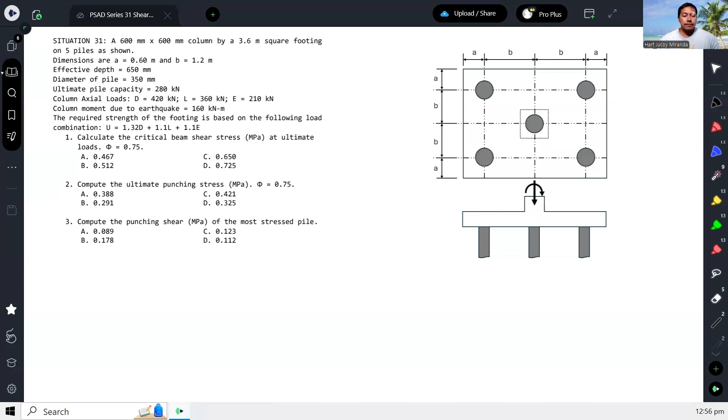If you would read this: a 600 millimeter by 600 millimeter column with a 3.6 meter square footing on 5 piles as shown. So in the drawing, this is the top view of the footing, this is the column. It's 600 by 600, so let me put the dimension: 0.6 by 0.6 meter. That's the column.

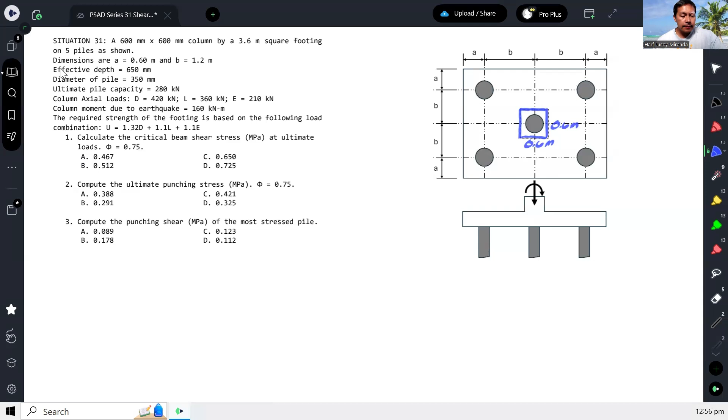Then the piles, the circles, their diameter is 350 millimeters. So diameter of the pile is 350 millimeters.

There are five piles: 1, 2, 3, 4, 5. A is 0.6, so this is 0.6, also this one. B is 1.2, so this is 1.2.

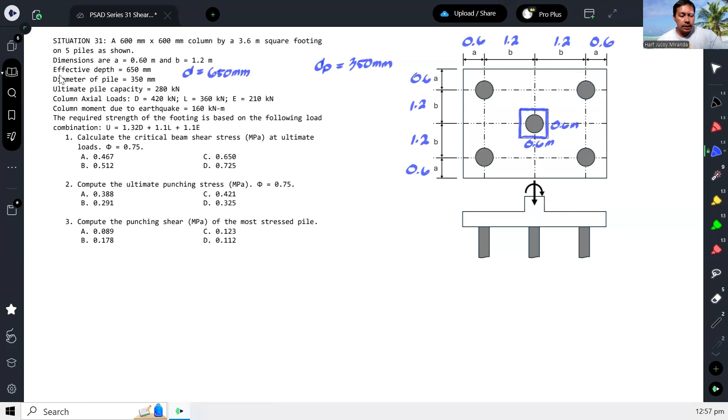Effective depth is 650 millimeters. Diameter of the pile, ultimate pile capacity - so the maximum reaction of the pile, maximum, is 280 kilonewtons.

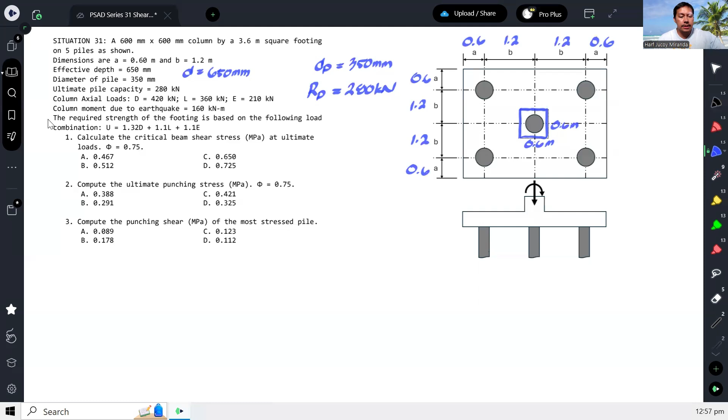That means the maximum it can resist. Column axial loads are given. Column moment due to earthquake is also given. The required strength of the footing is based on the following load combination.

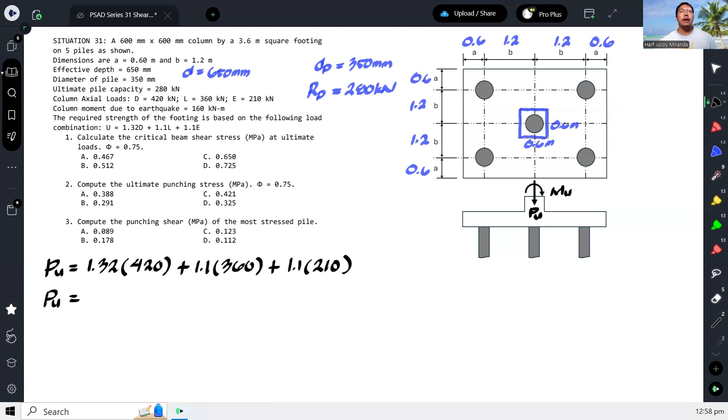Let's calculate that: 1.32 times 420 plus 1.1 times 360 plus 1.1 times 210. That gives us 1,181.4

kilonewtons. And then for our column moment, we will assume that this moment is unfactored, since it wasn't specified. So our ultimate moment will be equal to - since this is earthquake, the load factor is 1.1 times 160, which gives us 176 kilonewton-meters.

So those are now the factored loads on the column. Number 1: calculate the critical beam shear stress at ultimate loads. Then calculate the ultimate punching stress, and then calculate the punching stress of the most stressed pile. Actually, for all of these, although shear stress is being asked, we need to know what the reactions are at the piles. That's what we need to find out.

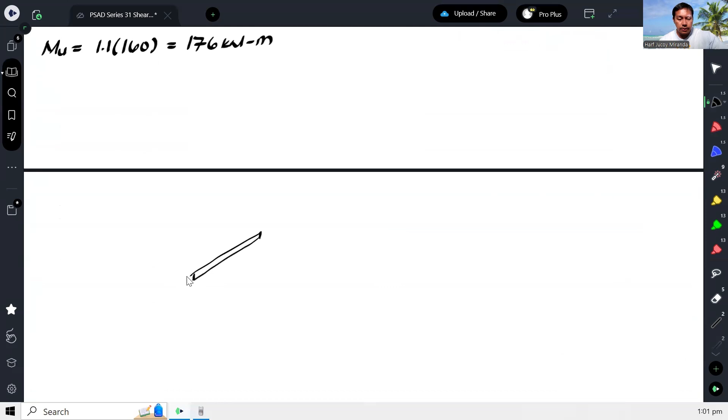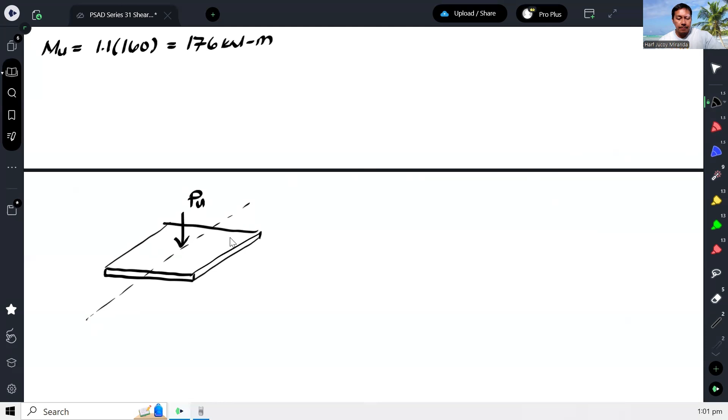So imagine this is our footing - again, just the concept first before we proceed with the main computation. Let's say this is the axis of bending. Let's say we apply an axial force PU at the center of the piles.

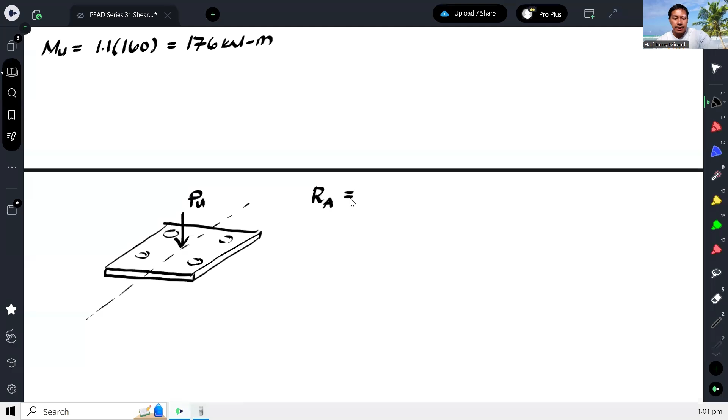So as I said, the reaction of the pile due to the axial load will just be PU divided by however many piles there are. Let's say N is the number of piles - that's already the reaction of the piles due to axial load.

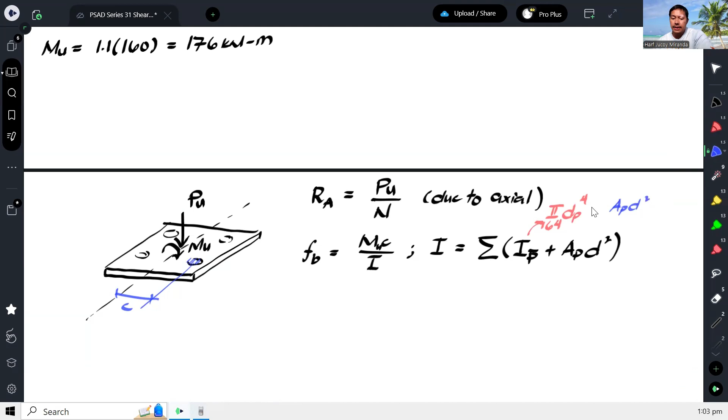Kaya lang, kapag kinompare daw natin ito, dito sa AP d squared, this is very small compare dito. Kaya ang ginagawa na lang dyan, nine-neglect na lang for simplicity. Okay, so therefore, ang nangyayari, nagiging summation na lang siya ng area ng pile times d squared.

Okay, so siguro gawin ko ito, instead na d, gawin nating r para sabihin ko lang na yung distance, radial distance nun. So bali, again, kung ito yung pile na tinutukoy, yung r ay measure mula sa axis of bending papunta dun sa pile. Ito yung r. Okay, so nagiging ganito ang moment of inertia.

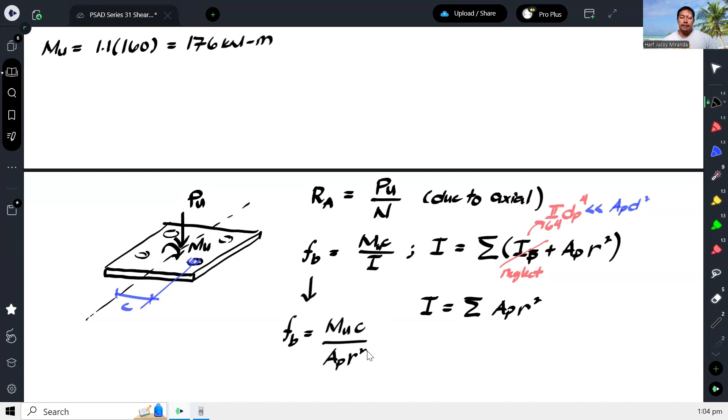So ibig sabihin, itong bending stress natin ay magiging mu c over AP r squared. Okay, na kung saan, kapag kinross multiply natin yan dun sa kaliwa, so magiging AP times FB is equal to mu C over R squared.

Actually, may summation dito, no, summation ng R squared. Etong part na to is, di ba, area times stress. Hindi ba yan ay reaction? Or yan ay force? Yan naman ang force due to the moment. Yan naman ang reaction ng pile due to the moment. So therefore, ang mangyayari, yung reaction ng pile due to moment is equal to mu C over summation of R squared.

Okay, kaya ngayon, pag pinag-combine natin yan, actually lahat ng yan, galing lang yan dito eh, galing lang yan lahat dito. So na yung normal stress ay equal sa P over A plus or minus MC over I. Dito lang yan galing. Kaya nangyari lang, ito, instead na P over A, no, magiging yung P kasi, PU over N, kasi kada pile.

PU over N over area ng pile. Plus or minus, yung M is MU, yung C is C, tapos over yung I natin is originally ito, no, summation of area ng pile times R squared. But once again, kapag in-cross multiply natin yan lahat dun sa stress, so magiging area ng pile times yung total stress is equal to PU over N plus or minus MUC over summation of R squared.

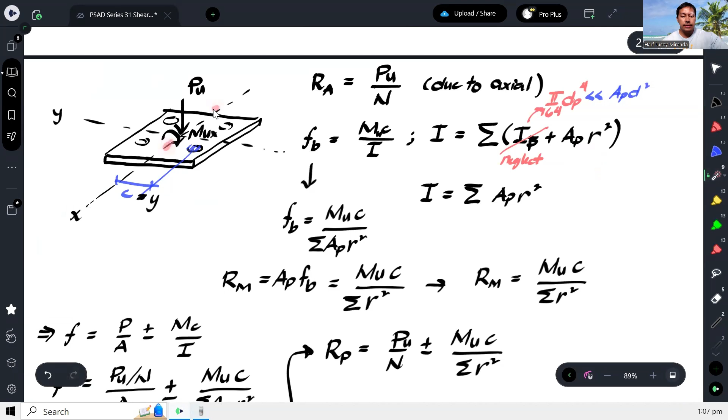Kasi yung R na yan, kung babalikan doon sa formula, di ba, mini-measure siya mula doon sa axis of bending, papunta doon sa kung ano yung pile na tinutukoy. Kaya mangyayari, revise nito, will be RP is equal to PU over N plus or minus MU about X times Y over summation of Y squared. Okay, ganyan yung nangyayari. Paano po kung meron pang bending sa kabila? Meron ding bending dito.

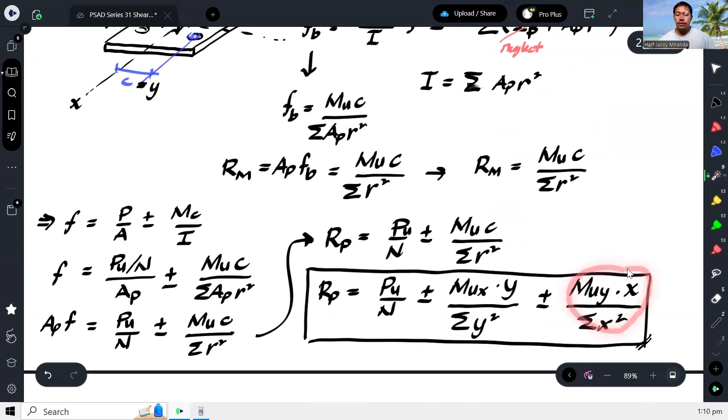So this is MUY. Therefore we have P over N. Let me just assume that compression is positive and tension is negative.

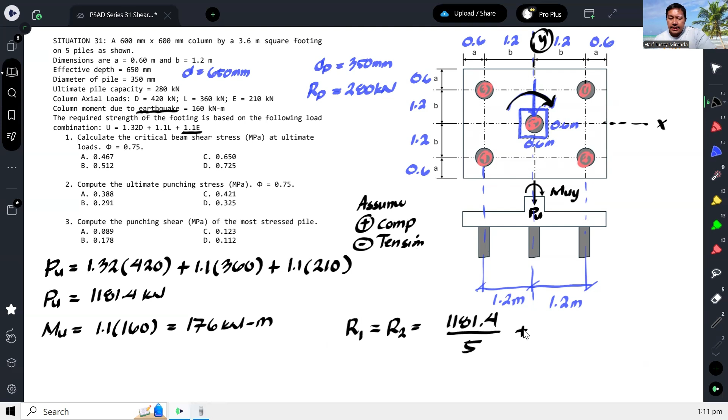Because what we expect for the reaction on foundations is compression. Anyway, for piles 1 and 2, we have P over N, which is 1181.4 divided by N, so 5 piles. Then plus, since this side is subject to compression, while the other side is subject to tension, and the other side is subject to compression.

So our M is 176. Then for Y, as I said, wherever the pile is from the axis of bending, just measure that distance. And that's it, so 1.2.

Over summation of y squared. So we just add up all their y values. The y of pile 1 is 1.2, the y of pile 2 is also 1.2, the y of pile 4 is 1.2, the y of pile 3 is 1.2, and the y of pile 5 is 0.

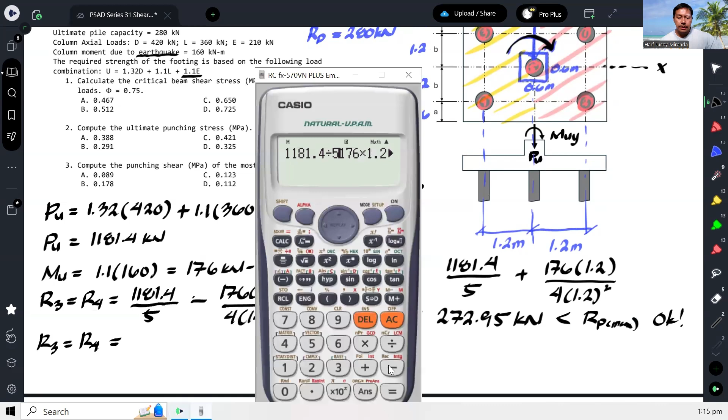Mangyayari dyan, R3 is equal to R4, which is going to be equal to, papalitan ko lang to ng minus. Okay, and as mentioned, mas maliit yan, 199.61 kilonewtons. So mas maliit, no? And then, kompletuhin ko na.

How about R5? Yung R5 is 1181.4 over 5. Tapos wala na to. Bakit? Kasi wala naman siyang distance mula dun sa neutral axis, kaya walang effect sa kanya yung bending, no? So that's why ang mangyayari lang dun kay 5 is burahin lang natin to. So magiging 236.28.

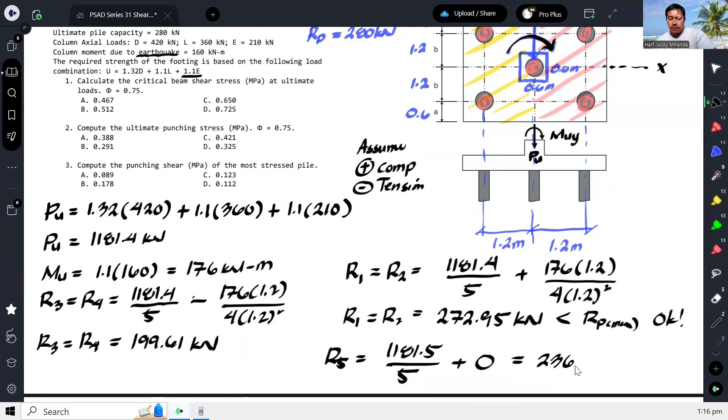So yan ngayon yung mga reactions ng pile, no? Kumbaga kapag i-drawing natin ng kompleto yan, so I'll try to do it, no? Kompleto.

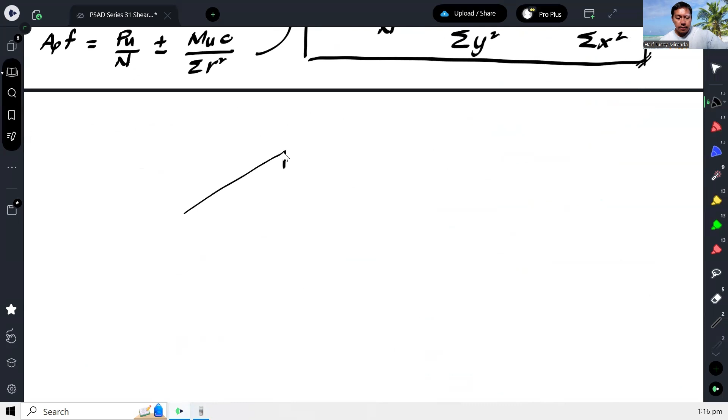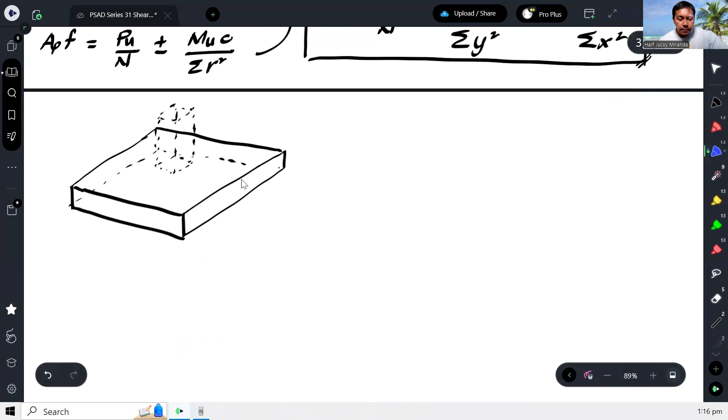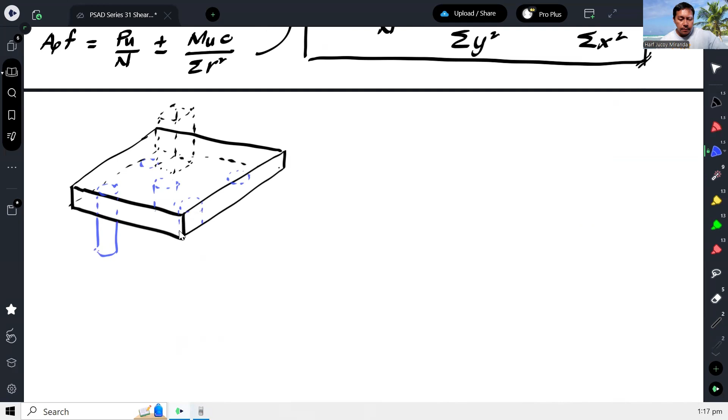So ito kunwari yung ano natin, footing, tas meron tayong pile dito sa ilalim. Okay, so ito yung unang pile. Yung pangalawa, yung nasa ilalim ng footing, yung 4 tsaka 3. Meron din dito. And then, ito pa nasa likod. Okay, sa inyo mga piles natin.

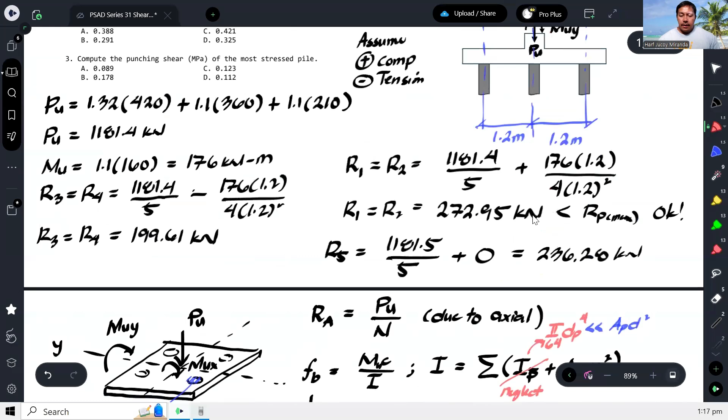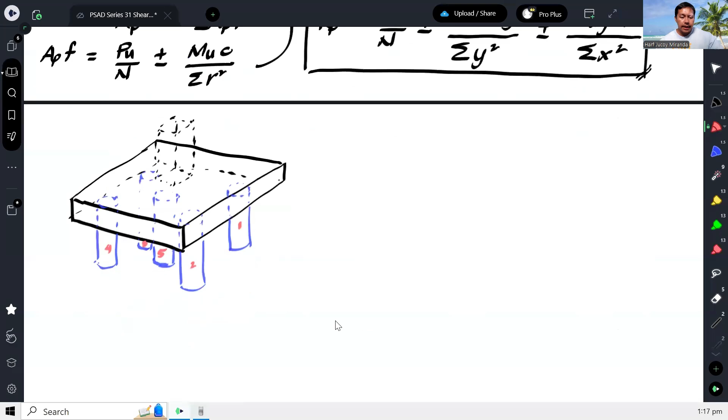So bali lumalabas ngayon, di ba, pinangalanan natin yan. Ito yung 1, 2, 3, 4. Ito yung 1, ito yung 2, ito yung 3, ito yung 4, ito yung 5. Okay, so lumalabas ngayon yung reaction dito, ito yung 272.95.

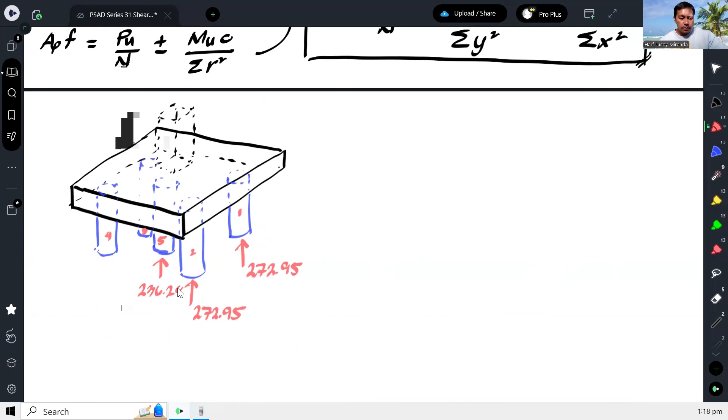Ito rin. Okay, yung reaction dito sa 5, ito naman yon, 236.28. Tapos yung reaction doon sa 3 at saka 4, yun naman yung 199.61.

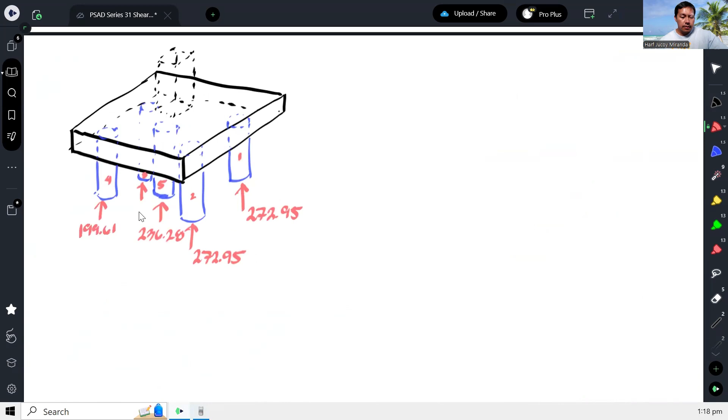So parang ganyan, no? Ganyan yung nangyayari. Tapos don't forget, meron pa tayong force dito, di ba? 1181.4, at saka may moment pa tayo na 176. Okay, so ganyan yung magiging reaction ng mga piles.

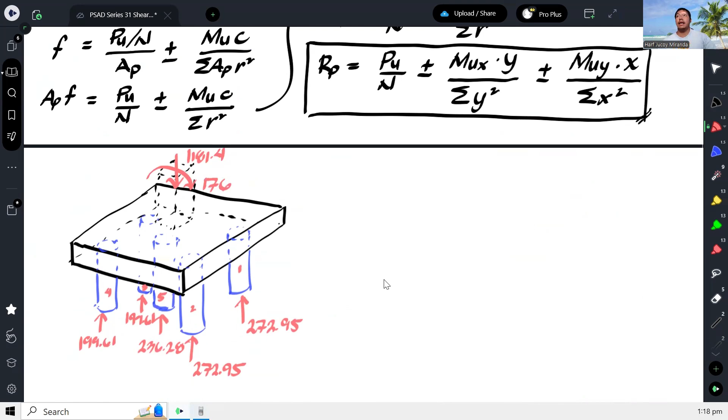So ngayon, pwede natin masagot yung mga tinatanong. Number 1, calculate the critical beam shear stress at ultimate load. So paano ba yung wide beam? Di ba, pwede mag-crack siya in this direction or in this direction. Basta lagi, ang critical section for wide beam shear is at a d distance from the face of the column.

No? Well, kung dito tayo magka-crack, ang kukontrahin netong crack na to is itong dalawang pile na to, okay, which has the maximum reaction. Kapag dito naman nag-crack, ang kukontrahin niya is yung reaction sa 1 tsaka sa 3. Kapag pinag-combine natin yun ay 272.95 tsaka 199.61, which kapag kinompare mo dun sa una, mas maliit, no? So kaya hindi yun yung critical.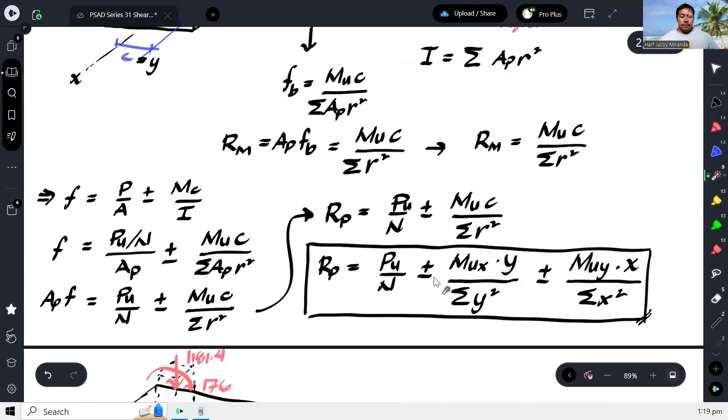Lalo na to, hindi ito critical kasi parehas 199 yan. So ang pinaka-critical lang talaga ito. Okay, ibig sabihin, so let me just redraw that. So ibig sabihin for number 1, okay, for number 1, i-consider natin na critical section ay ito.

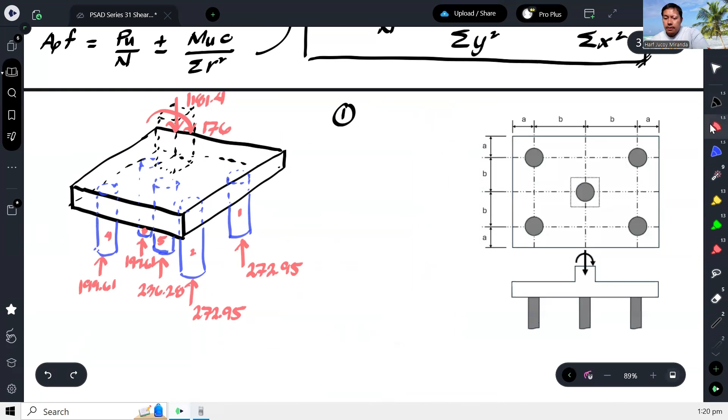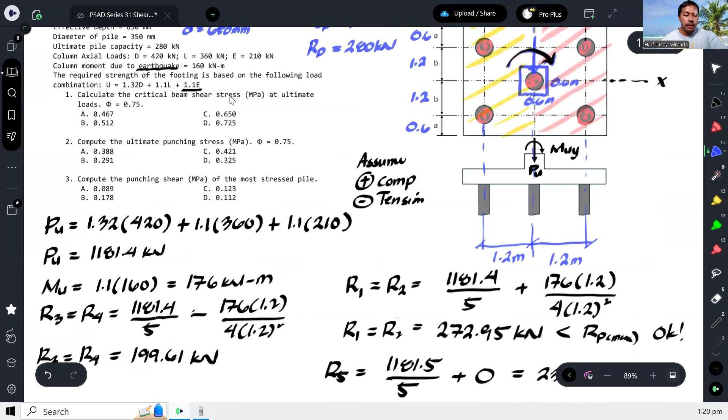Ayan, okay, so gawin natin yung red. So ito yung magiging basag niya. Okay, and it will happen at a d distance from the face of the support or face of the column. Okay, wherein D is the effective depth, and that is given in the problem, that was 650 millimeters.

Okay? So kapag in-isolate natin tong part na to, bali sa drawing ko dito, ito yan. Ayan yung mababasa. Okay, so kapag in-isolate natin yan, ganito siya. So ito yung crack, ayan. And then, ito yung dalawang piles.

Okay, so ang kukontra dun sa reaction ng pile na in this case ay dalawang 272.95 is itong surface na to. Yung critical section na yan.

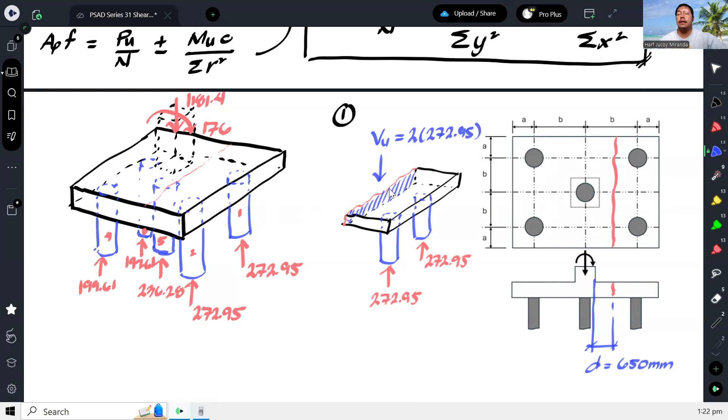Okay, yun na yung ultimate shear force at the critical section of wide beam shear. So that is simply 2 times 272.95 kapag nag-summation ng forces vertical. Okay, and to answer the first question, yung magiging, ano bang kailangan? Critical beam shear stress at ultimate loads.

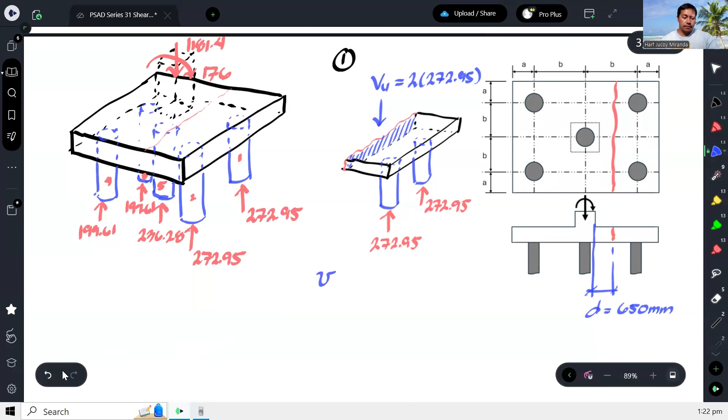So ibig sabihin, ang tinatanong dito ay, actually ang tinatanong dapat dito is ultimate beam shear stress. Okay, ultimate, kasi in-specify niya at ultimate loads. So ibig sabihin, ang kailangan natin dyan is, ulitin ko lang, no, itong Vn, okay, which is Vu over phi b0d. Okay, ito ay nominal shear stress.

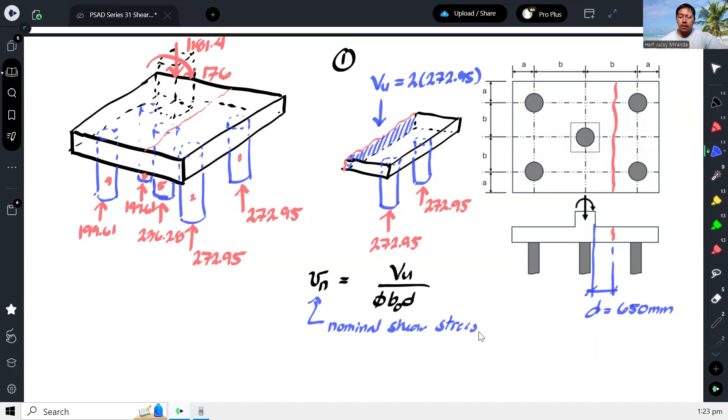Okay, that is nominal shear stress. If you want it to become ultimate shear stress, this phi, just cross multiply it. So it becomes phi Vn equals Vu over b0d. So this is the ultimate shear stress or design shear stress.

Okay, so this is what we'll adapt. We have phi Vn equals Vu, which is 2 times 272.95, let's convert to Newtons, so multiply by 1,000, over b0d. As mentioned in my previous discussions, remember that this b0 is the length of the crack, the length of the break.

What is this? If we add all of these up: 0.6 times 2 plus 1.2 times 2, that gives us 3.6. Actually, the dimension of the footing is 3.6 by 3.6, okay, 3.6 by 3.6.

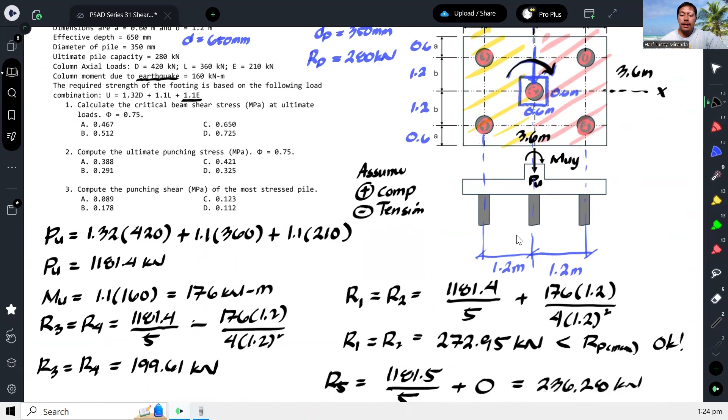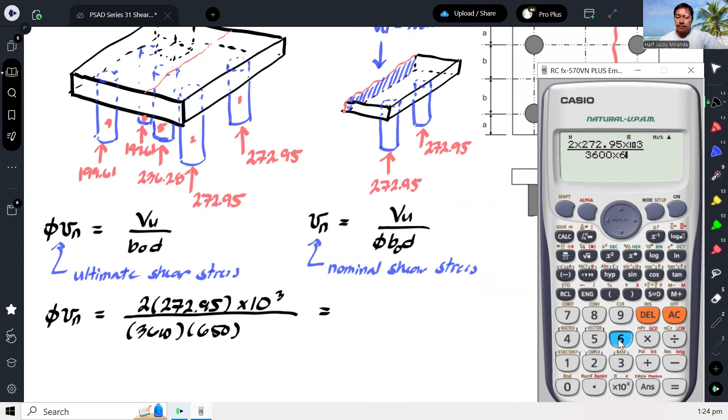So that will be the length of the crack, 3.6. So we have 3.6 or 3,600 millimeters times effective depth of 650, and that will be our ultimate or design shear stress. So that is 2 times 272.95 thousand over 3,600 times 650, and that gives us 0.233 megapascals.

Okay, and that will be our answer for number 1. Actually, it's not here. Let's check the nominal, 0.75. Okay, also not there. So I believe there's an error in the choices, so let me compute both.

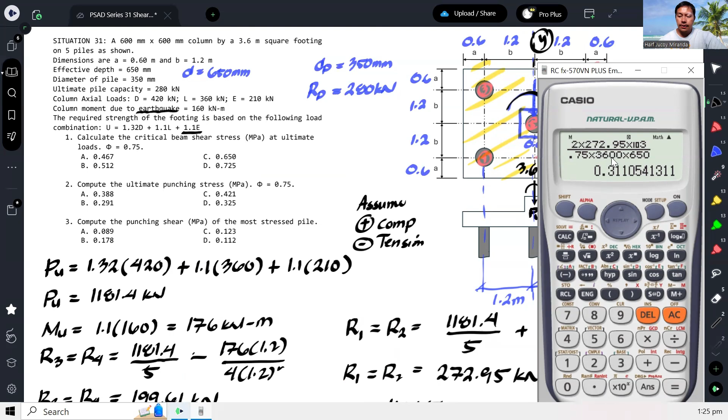If nominal, this is it. If ultimate, this is it. So nominal, this is nominal, this is the ultimate. So that is 0.233 megapascals. That should be the answer.

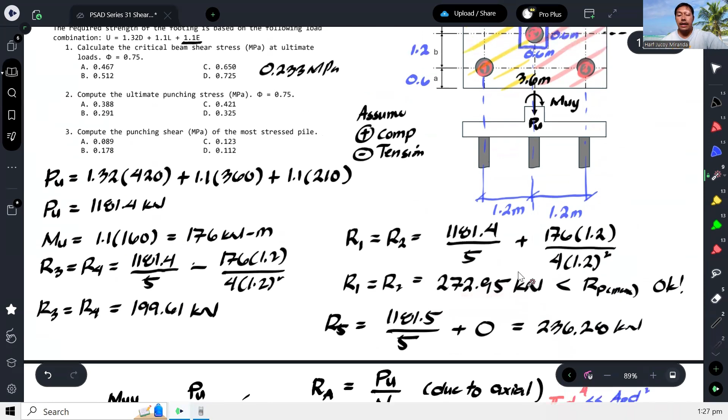So again, remember: punching shear will occur at a d over 2 distance around the column or pile. So this is how the crack looks. The measurement here is d over 2, same on the other side, so the total is just d. We just add d.

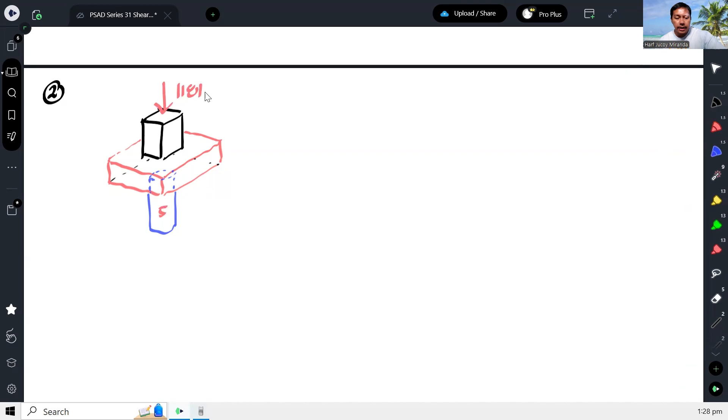So the part of the concrete that resists these forces is this one. Oh, and also at the back, and this one too, around the lateral surface area of the crack section. So here, this is the effective depth.

Then this measurement, let me shade it in black so it's visible. This measurement will be the length of the column plus effective depth, because if we recall, it's measured at a d over 2 distance from the face of the column. So this is d over 2, this is d over 2, and this is the length of the column, so the total is the length of the column plus d. And since the column is square, the other side is the same: length of column plus d.

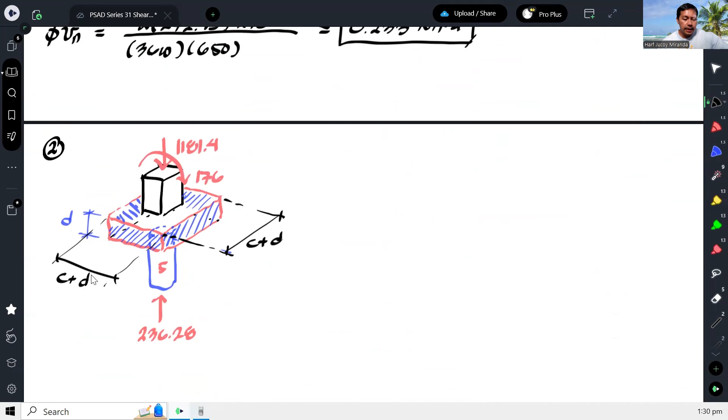Okay, now let's see what it equals. What is the length of the column? It's 600, 600. Then our effective depth is 650, so that gives us 1,250 millimeters.

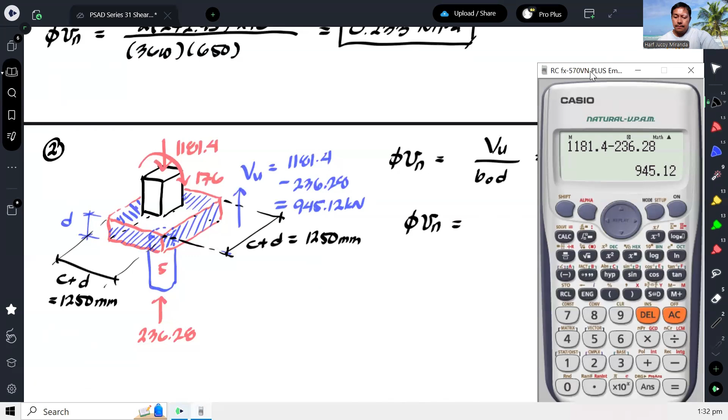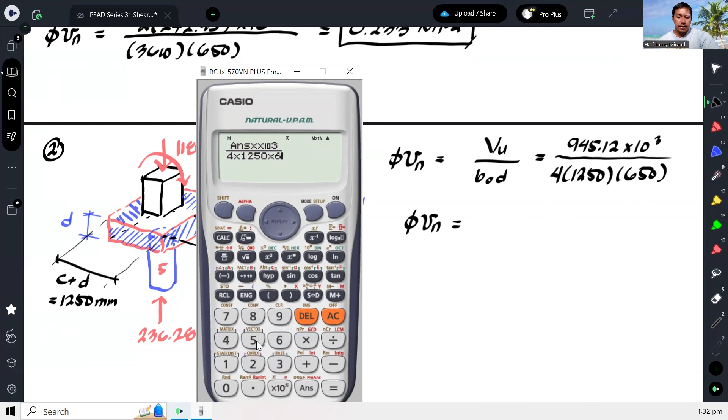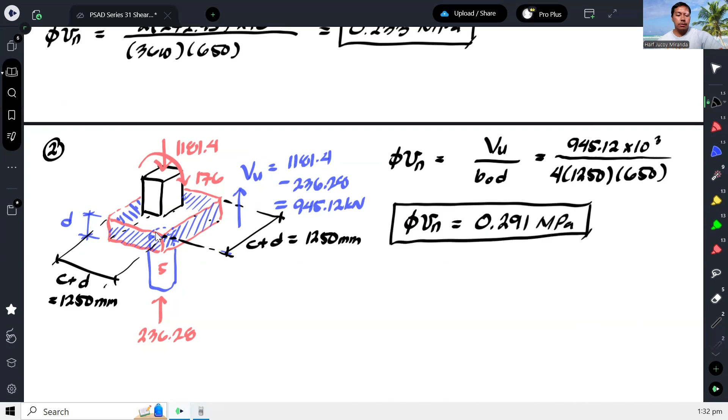Tapos effective depth na 650, and that will give us our ultimate shear stress. So that is 4 times 1,250 times 650. So 0.91, 0.291 rather, megapascals. Okay, and that will be our answer for number 2, letter B.

Okay, next, compute the punching shear of the most stressed pile. So hinahanap naman punching shear lang ng most stressed pile. Dito, alam naman natin na either 1 or 2 lang yung most stressed. So mamili na lang tayo ng isa.

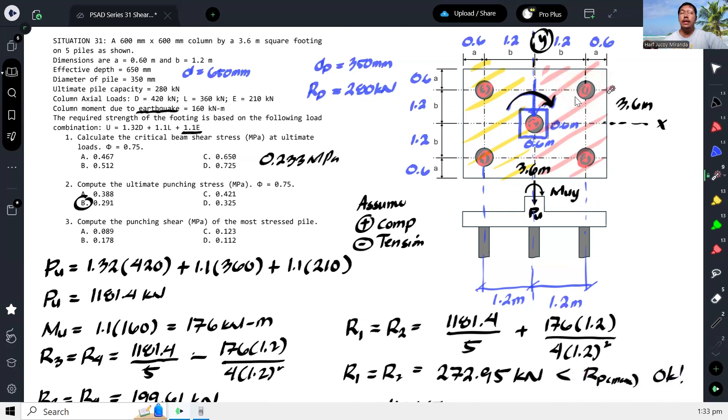Ganun ulit, ang idea ng punching shear is the crack will develop d over 2 distance from the surface of the pile around its perimeter. Kaya ibig sabihin, parang ganito mangyayari, magkakaroon ng crack na pag ganito, na ang sukat ay d over 2. So bali parang ganito yan sa number 3.

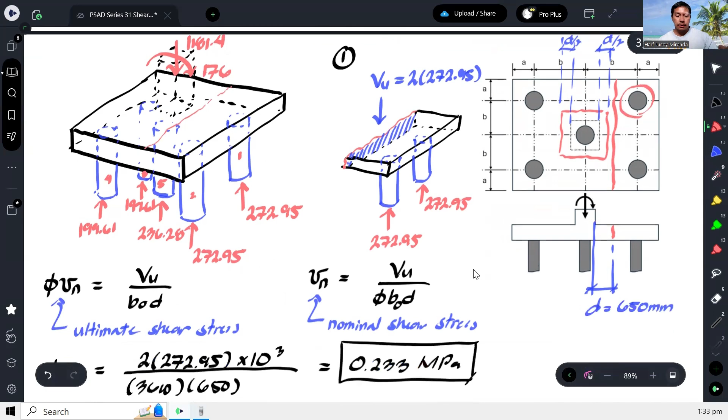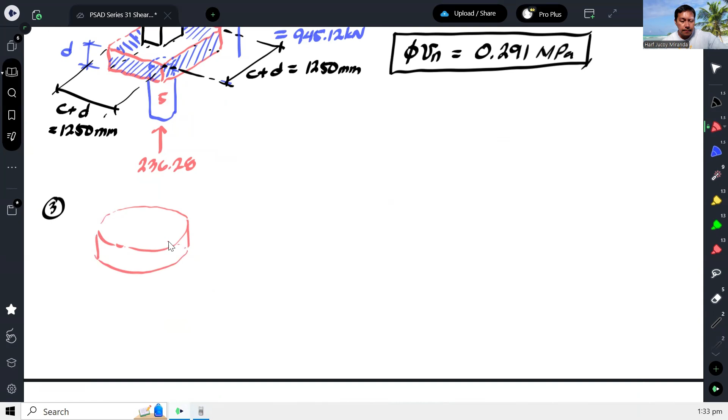Kunwari na lang, yung pile number 1 yung kunin ko. So mababasag niya itong ibabaw, yung magiging basag ng ibabaw. Okay? Tapos ito yung pile sa ilalim. Ito yung pile number 1.

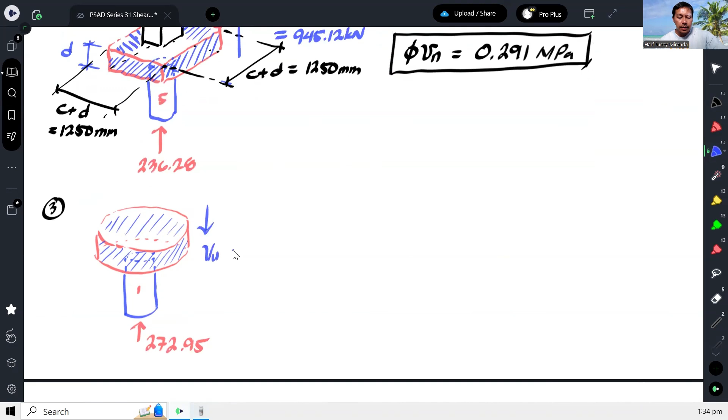272.95. Tapos yung kukontra dyan na part ng concrete, ito, sa kabila rin. Okay, so yung magiging reaction lang ng concrete na VU will just be exactly 272.95 kapag nag-summation of forces vertical. Tapos, ano pa?

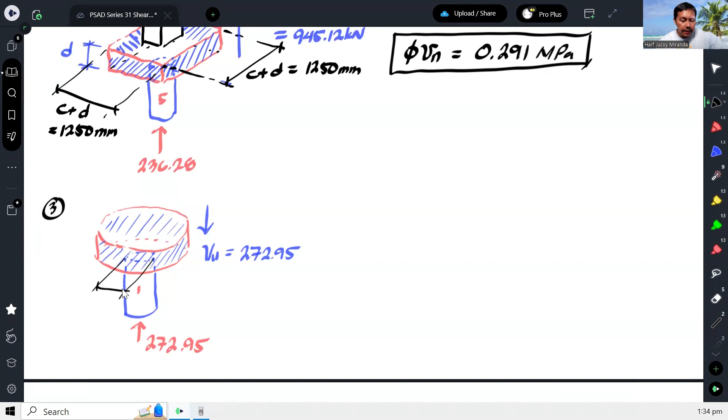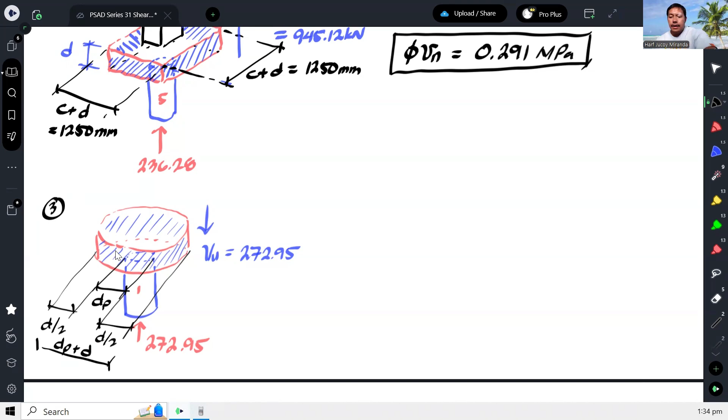Kailangan ko rin yung dimension nito. So magiging dimension lang nito, mula dito hanggang dito is diameter ng pile. Tapos sabi ko nga, mula dito hanggang dito will just be effective depth over 2, sa kabila ganun din. So ibig sabihin, yung total diameter niyan will just be the diameter of the pile plus yung effective depth.

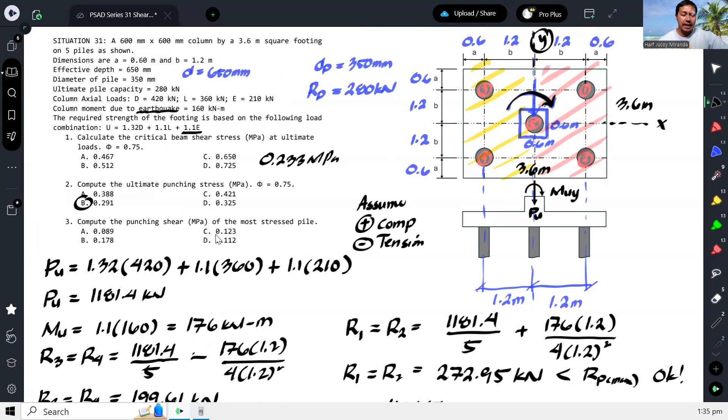At again, dahil ang tinatanong ay punching shear of the most stressed pile, walang nakaspecify kung ultimate or nominal. So check na lang natin mamaya. Kung ultimate halimbawa, for number 3, phi Vn is equal to Vu over bo d. Ang Vu natin is 272.95 times 1,000 para maging Newton, para maging automatic na megapascal yung sagot.

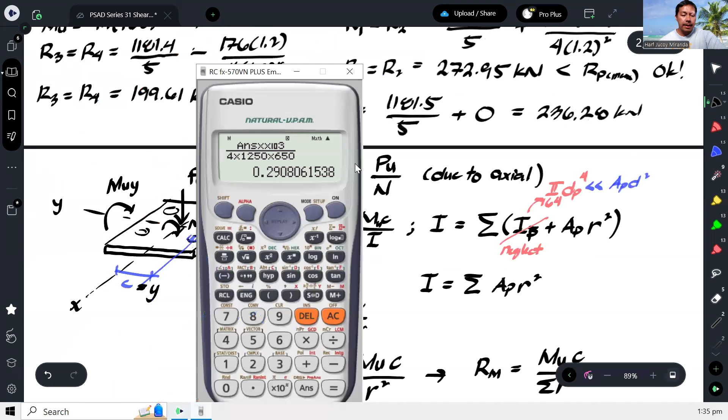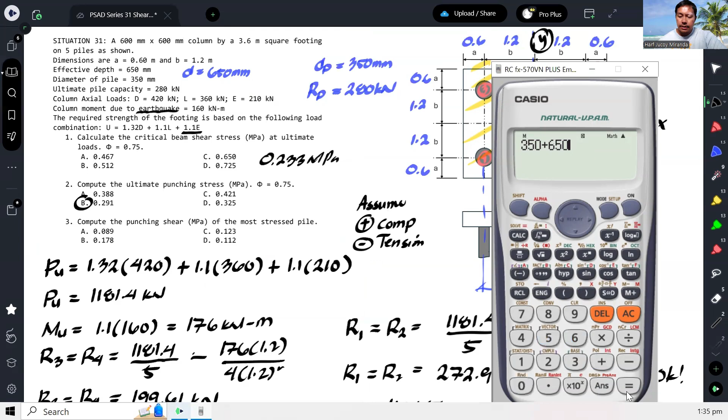Tapos yung BO is yung length ng crack, which is the circumference of the circle, na ang diameter ay diameter ng pile plus d. Ano nga pala yung diameter ng pile plus effective depth? Ang diameter ng pile given sa problem is 350, ang effective depth is 650. So that is 1,000 mm.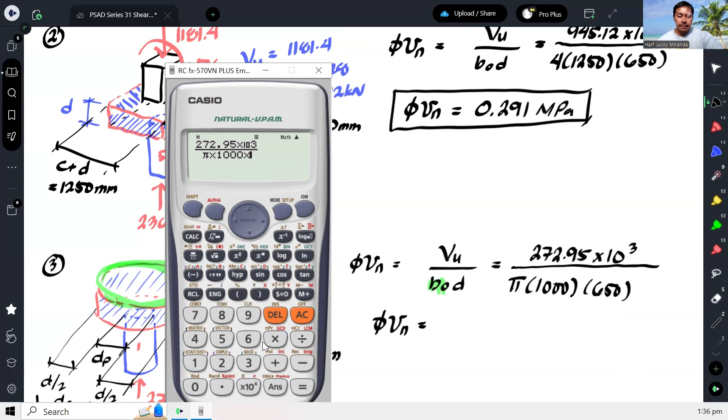Okay, ibig sabihin yung length ng basag is circumference. Di ba ang circumference ng circle, diameter times pi or pi times diameter. So pi times 1,000 times effective depth, 650, so times 650. Yung magiging ultimate shear stress dito will become 272,950 over pi times 1,000 times 650, and that gives me 0.134.

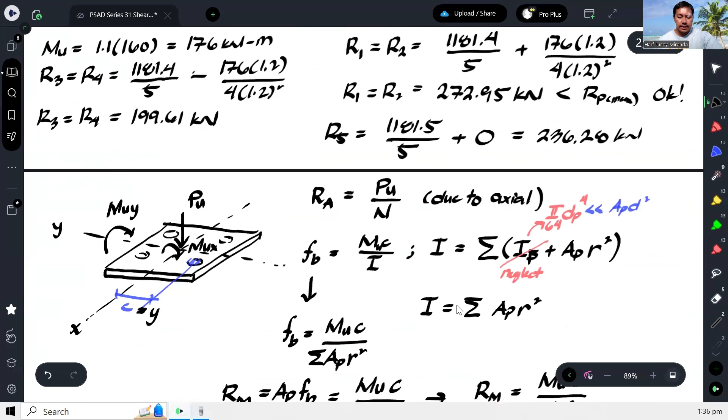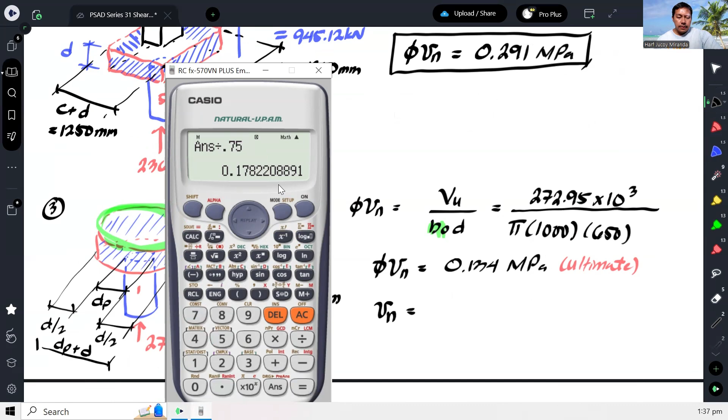Okay, wala sa choices yung ultimate, so itry natin yung nominal. O, Vn, ibig sabihin, di-divide lang natin yan ng 0.75. So 0.178 megapascals kapag nominal. Okay, and sa choices, letter B yung sagot.

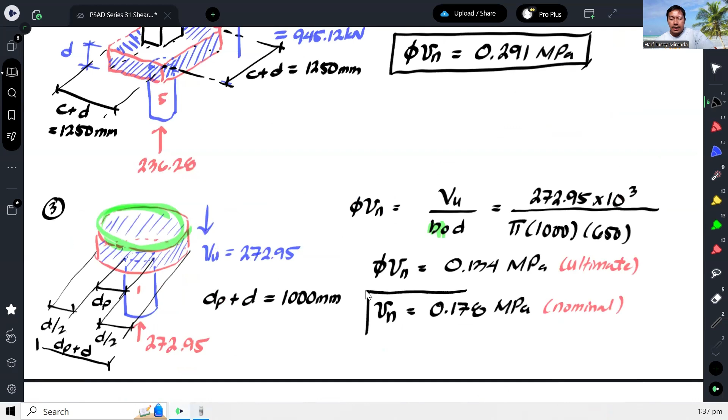So for number 3, ang tinatanong niya doon is yung nominal shear stress. Okay, of course, the board exam is not perfect kagaya ng question dito. Kaya sinadya ko rin na hindi ko masyadong binago yung given or yung problem statement. Kasi even the problem statement itself may sometimes be confusing kung ano bang tinatanong, nominal ba or ultimate or design stress. Kapag sinabing ultimate, then straightforward, ultimate. Pag sinabing nominal, straightforward na nominal. Pero pag walang binanggit, then that's the time you try both.

Solve mo parehas, and hopefully fingers crossed na isa lang na nandun sa choices ang meron, dahil hindi nga nakaspecify kung ano talaga yung gustong isagot mo ng examiner. Pero based on experience naman, kung halimbawa hindi na specify kung anong klaseng stress yung tinatanong, nominal ba or ultimate, kadalasan isa lang naman ang nasa choices, kagaya nitong sa number 3. Pero minsan kapag naka-specify na ultimate, doon ka mag-iingat kasi minsan nakalagay din doon sa choices yung nominal kapag hindi mo binasa maigi yung tinatanong ng examiner.

Okay, so hopefully nakatulong itong problem na to for your upcoming board exam.